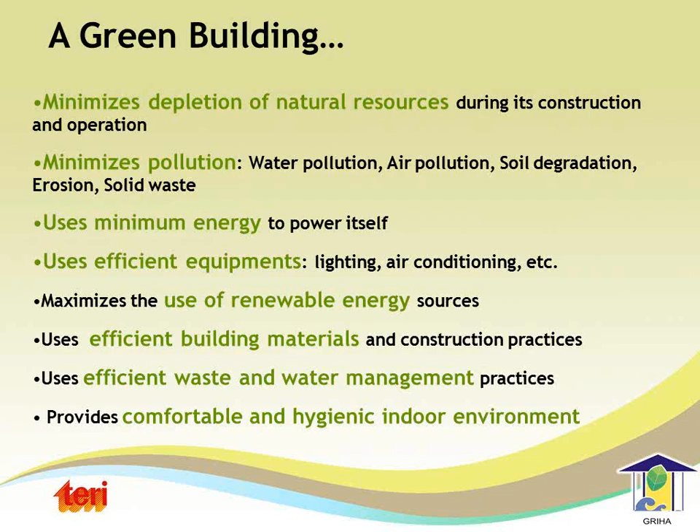A green building, of course, has minimum impact on site and surroundings. And when we construct a green building, we ensure that there is enough erosion control, stormwater management, pollution control, tree protection, and heat island control. Each of these measures has an impact on environment.

For example, as soon as we excavate a site for constructing a building, the water that is an outflow, during rainy season or otherwise, takes away the soil and it clogs the stormwater drainage system that surrounds that particular piece of land where we are constructing. In a green building practice, what we tend to do is to ensure that my surroundings are not affected, which means that I would build sedimentation control systems and other systems to ensure that whatever spillage is happening from my site is taken care of and it doesn't cause environmental degradation around my site.

In a green building practice, whenever a site is assigned for a particular construction, we have to ensure that there is maximum protection of trees, which means that the architect, the contractor, all of them have a large role to play to ensure that as many of the mature trees that are there on site are integrated with the design, and during the construction process they are protected.

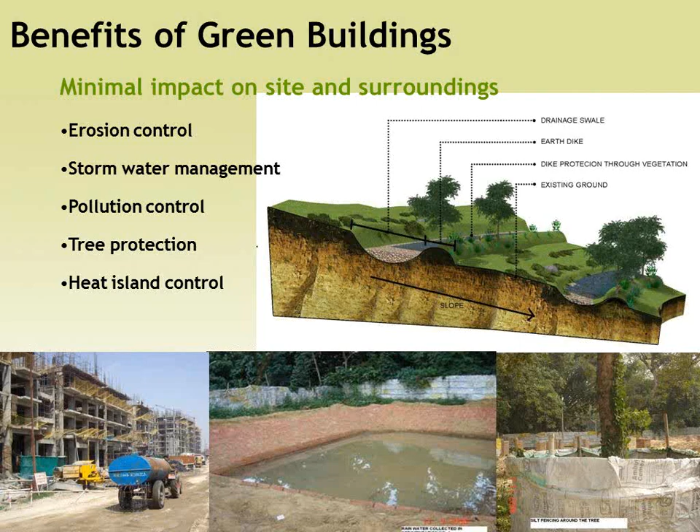The other impact of a building is on the water resources, which is very vital to us. And we also have seen that when we construct greener buildings, we are able to save water through use of better fixtures, better management practices, rainwater harvesting, water treatment on site, recycling and reuse. We are able to save 30 to 40% of this vital resource.

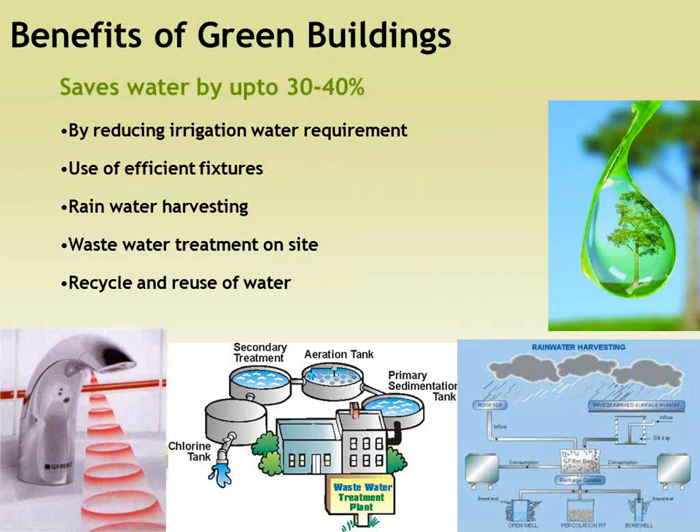And typically speaking, if a design is done well in an energy efficient way, and if we are able to deploy appropriate solar passive measures, which means architectural measures that are conducive to the particular climate zone where we are constructing, and if we are able to use efficient building systems, we can cut down our energy consumption in comparison to a conventional building by up to 50%. And this 50% balance energy can be met through usage of renewable energy systems.

So in the current policy dialogues and in the current dialogue around greener buildings, many of you would have come across the term net zero or net positive buildings, which means these are buildings that not only save energy through energy saving measures, but also whatever energy is required by this efficient building gets generated on site, and the building is not reliant on the grid electricity to power itself.

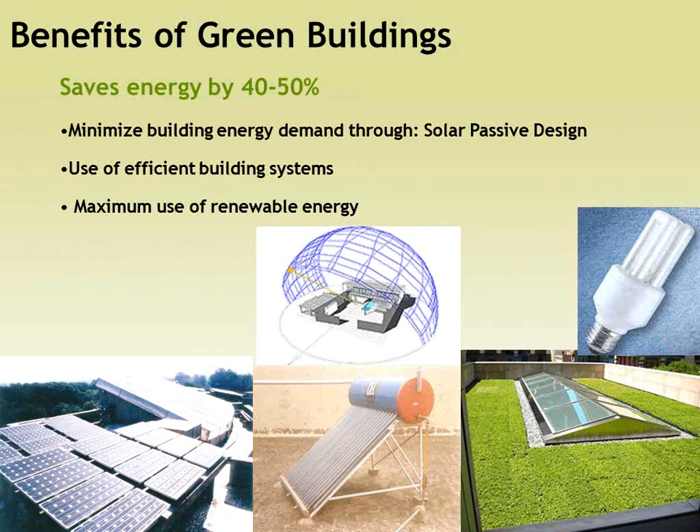So benefits of green building are quite a lot, and another very crucial aspect which is particularly important to India is the issue of solid waste management. In all our cities, particularly if you look at cities like Bangalore and several other upcoming cities, there is a huge problem of solid waste that gets dumped indiscriminately around the city, thereby not only taking up a lot of space but also leading to several other health issues. And untreated solid waste is a huge urban problem.

So if solid waste, particularly the organic solid waste, can be treated on site, then that is another major benefit of a green building. So a green building calls for, when it is under operation, efficient waste segregation, suitable storage and disposal at building level, and resource recovery from waste.

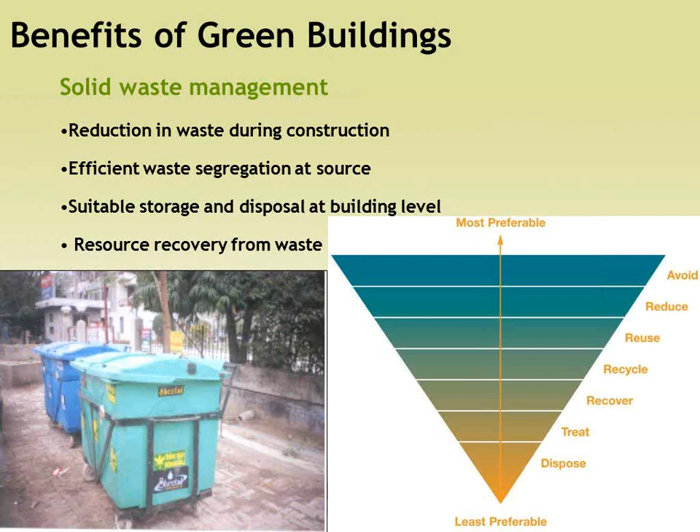And as I mentioned earlier, in a green building, we tend to use more recycled, reusable products. For example, usage of fly ash and blast furnace slag in building construction, say replacement of cement in concrete by fly ash, or use of fly ash blocks and bricks, can not only help us in reusing waste products but also leads to lesser embodied energy content in a building.

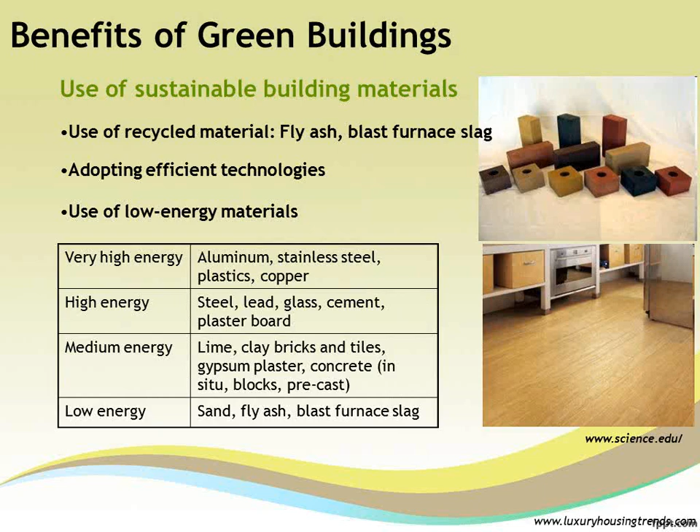So if you really see in a building, there are certain items, for example, aluminium, steel, plastics, copper, which have very high embodied energy content, and we should try to use these materials minimally and tend to use more low energy materials. And as I mentioned earlier, green buildings of course provide a healthier and more productive environment.

Now coming into a bit more detail on how and what you and I can do as a common person, let me dwell a little bit more on the energy efficiency aspect of a building. Because energy is becoming more and more expensive by the day, unless we are able to tap the energy efficiency aspects right from the design stage, we cannot get the maximum benefit through green building design interventions.

So when we look at energy efficiency incorporation, basically at the design stage we look at the site and surroundings, incorporation of energy efficient architectural features, use of better building materials that help you to reduce the heat gain, and daylight integration, which means that if you are able to use daylight for the maximum time of the day, you can save on electricity consumption in lighting.

Then on the system side, you look at use of better products, both in lighting as well as in cooling systems, for example, ceiling fans, air conditioners, low energy cooling systems. And then you also look at finally renewable energy integration through solar and other devices.

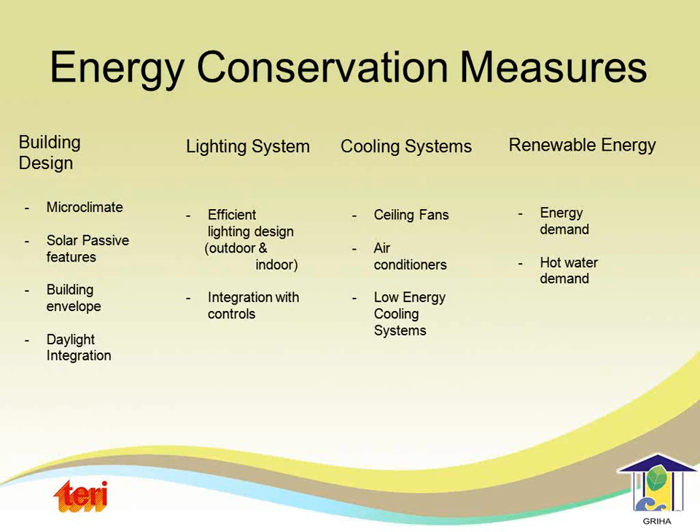Broadly classifying energy efficiency interventions, let me share a few of the design interventions that you and I can use. First thing is to look at sustainable site planning, then incorporation of passive features, optimization of building envelope, and daylight integration and natural ventilation.

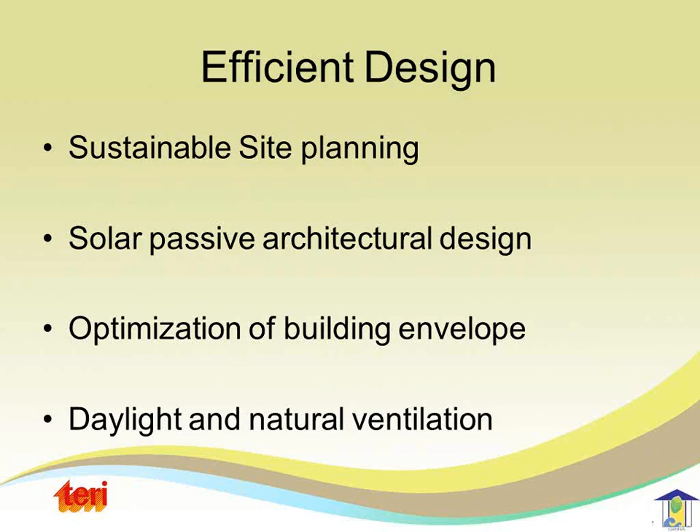Coming to sustainable site practice, as I mentioned earlier, it is very important to protect the trees, not only because of the fact that trees act as a great sequestration device, but also trees provide much required shade of the building, which has a natural cooling effect, as well as it has a large impact on creating cooler microclimate, which is very important for a hot climate like India.

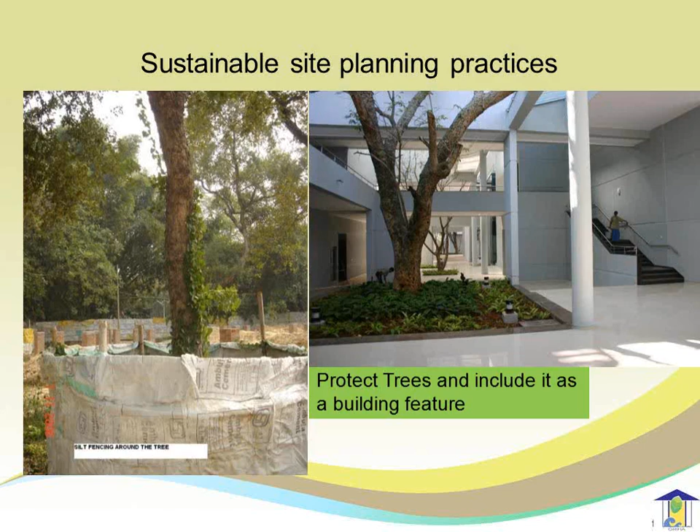The other thing which is very important, as I mentioned, is use of sedimentation systems to ensure that your site pollutants do not pollute the site and surroundings around your particular project. The next thing which is very crucial is usage, protection and reusage of topsoil. As we all know, the first few inches of soil which is able to support vegetation is very fertile.

So during a normal construction process, we tend to excavate everything and throw it out. However, it is very important to store it separately and reuse it back for landscaping purposes, which saves on valuable water requirement when you are putting in the landscape, as well as usage of chemical fertilizers.

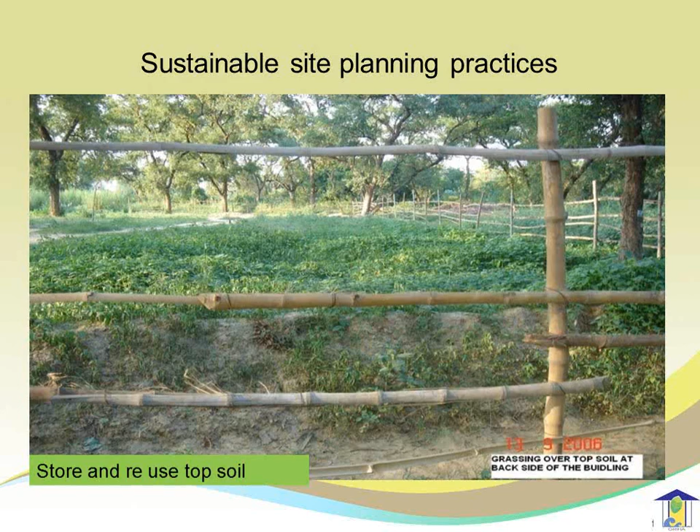The next important thing which we must take into account is limiting the construction footprint, not indiscriminately spoiling the entire site and strewing construction all over. And also importantly, take adequate steps to mitigate urban heat island impact, which means lesser usage of paving around your site, usage of shaded pavements, or usage of high albedo reflective surfaces.

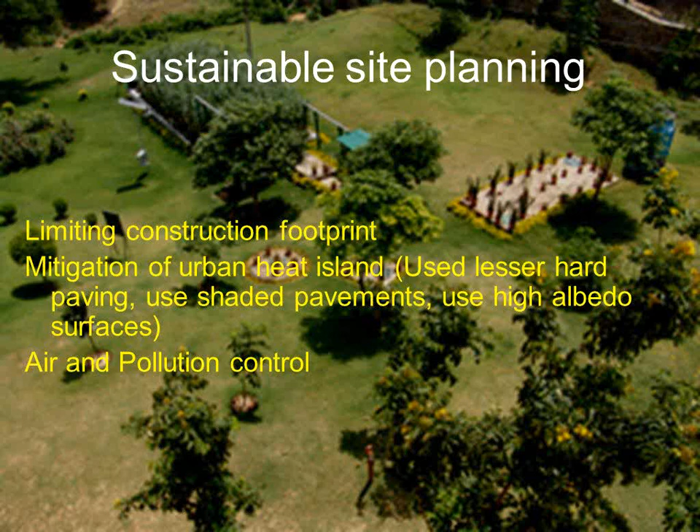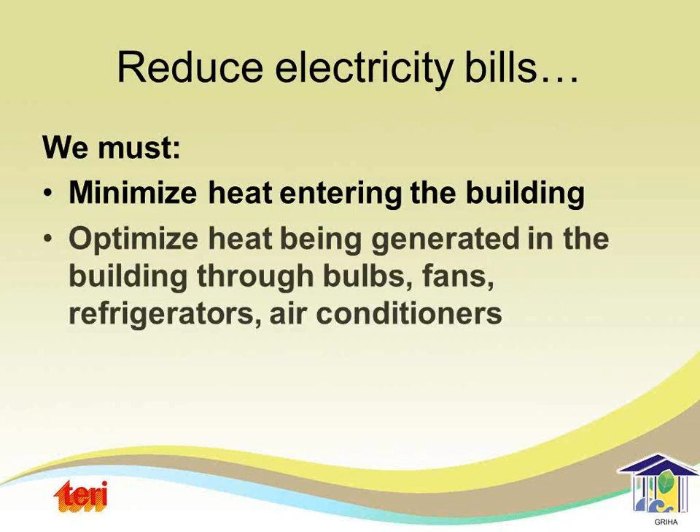Coming to what you and I can do to reduce our electricity bills, particularly these few slides are applicable mostly to hot climate like ours, where through an appropriate building design, we must try and minimize heat that enters the building, optimize heat that is being generated through the different devices that operate in a building, which means the internal loads, use efficient appliances, as well as use adequate daylight and avoid artificial lighting.

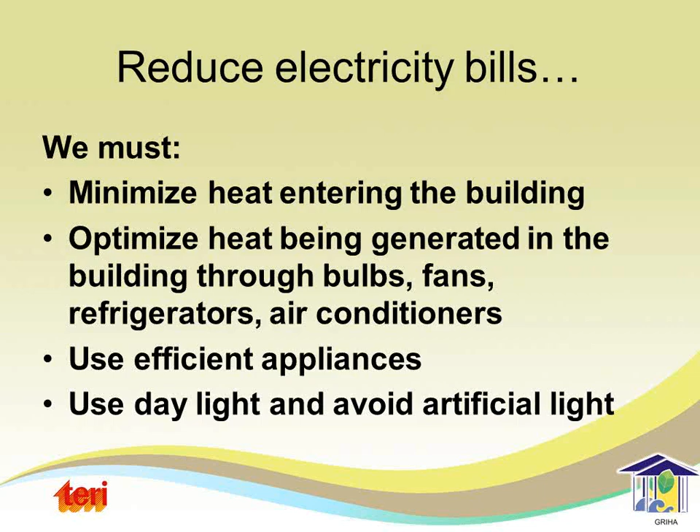Now, obviously, you will ask what are the impacts, like why is it essential for us to consider all these things, which will help us to reduce our electricity bills. Often we don't realize that when we switch on appliances such as computers and artificial light, in addition to consuming electricity, they also generate heat. A computer or a light as a source, in addition to performing its function, will generate heat that adds to the heat load of a particular space.

For example, 12 computers will need about 1 ton of air conditioning to remove the heat they generate. In a small room, if you have 12 computers operating at the same point in time, in addition to whatever air conditioning you are putting, you will need 1 ton of extra air conditioning to remove only the heat that these computers generate.

Similarly, suppose in a room you have 35 normal tube lights, and you keep them on unnecessarily even during daytime when you can use daylight. For the heat these 35 tube lights generate, you will need an additional half ton of AC to remove the heat. So these are often some of the things that we tend to ignore, and we must keep them in mind if we are trying to save energy.

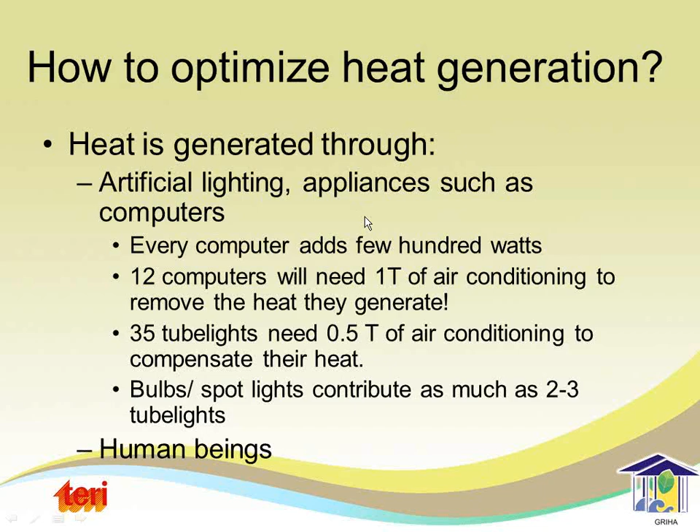Similarly, human beings are also big producers of heat, and the more people you have in a room, the more heat you need to remove. So all of these add to your air conditioning load and your electricity bills. So obviously the next question would be, how do you minimize the heat that comes into a particular building? There are a few common tips which everybody can follow.

One thing is that you need to protect your roof, windows and walls from heat gain, and the simplest thing one can do is to shade them appropriately, use appropriate building materials, and use appropriate insulation products in places from where the heat will come in.

So 3 things you have to keep in mind here: how you use effective roof insulation, what kind of shading systems you provide in windows and what kind of glass you use in windows, and what kind of insulation and material you use for walls, because these are the 3 key components through which the heat will come inside a particular building.

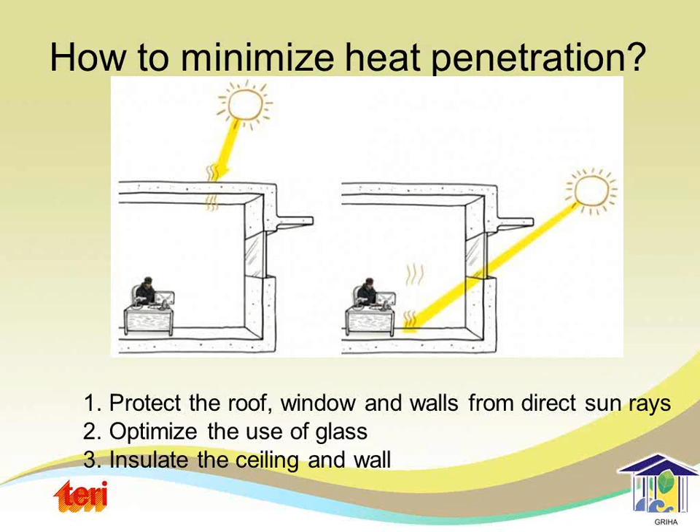The other important thing is orientation of a particular building, in which many of us do not have much control. However, if you have a control on deciding which orientation your rooms should face, ideal orientation is north and south, which means that you should have minimum exposure to east and west, because this is from where your maximum intensity of solar radiation will come in. From south also you get a lot of radiation, but you can protect your south facades by very minimal shading protection. So this is an important aspect of green design, to orient your building well.

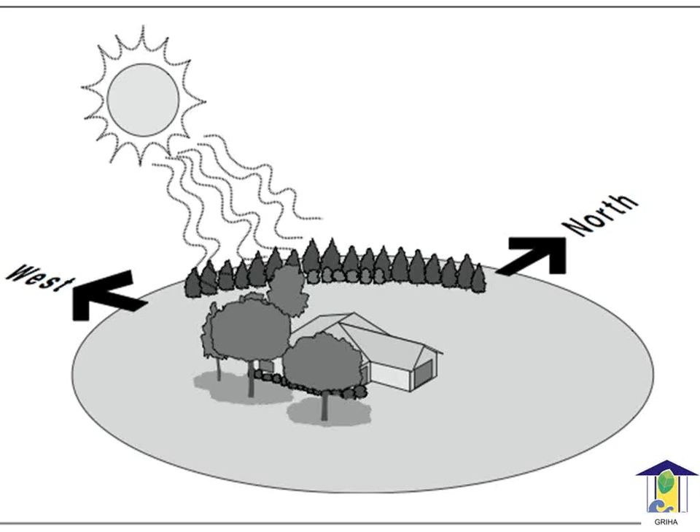Then of course, what kind of materials that you use. In the next slide, you will see that there is a picture of a green roof, which obviously by seeing this only you can make out that it provides a cooling effect. And there are some experiments that we have done, and I'll show you in the slides, how things like a cool roof or a green roof can help to reduce the heat ingress in your building and reduce your energy consumption.

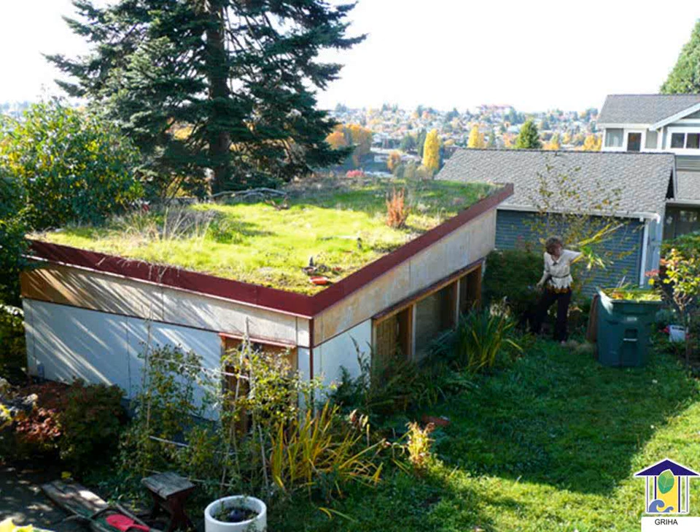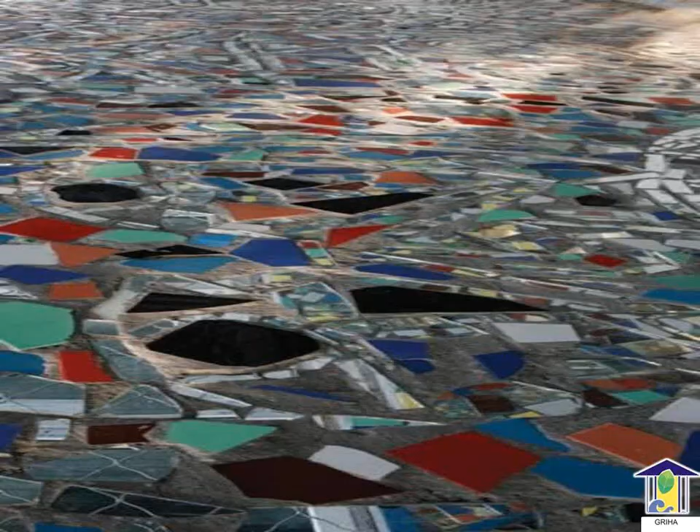There is another commonly used technique, and this is particularly applicable for households that have an exposed roof. As we know, the maximum heat comes in from the roof, and you can use broken tiles, broken china mosaic to cover the roof. The lighter the color, the better. If you are able to do a china mosaic using a white color, then it is the best possible option.

We have recently done certain experiments to see the impact of cool roofs, and we have found that up to 35-degree reduction in surface temperature is possible if you are using high albedo paint or cool roof on your rooftop, and up to 20% of power saving in air-conditioned spaces can be accrued by using cool roof, and this is particularly applicable to the top floor spaces in any house.

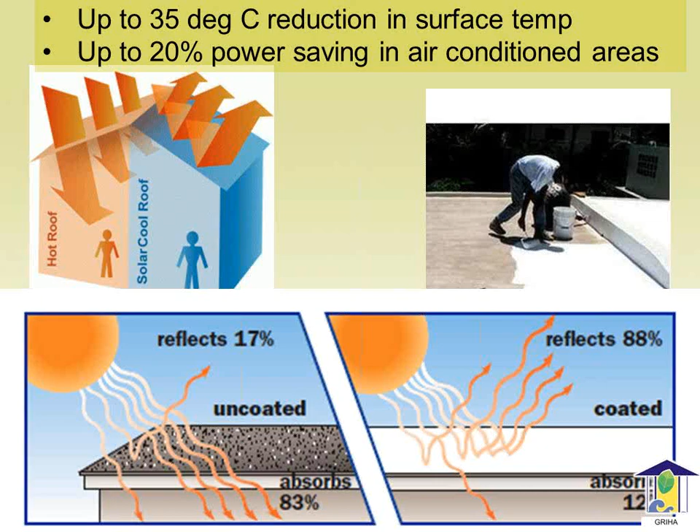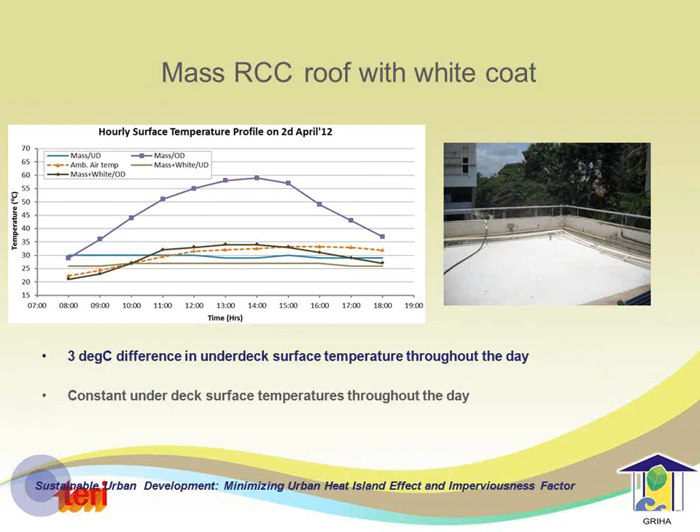Similarly, if some people cannot have a cool roof, you can have a roof garden. The green roof also has a similar kind of an impact and has a great moderating effect on a particular space. So these are some of the common things that one can easily deploy in a house.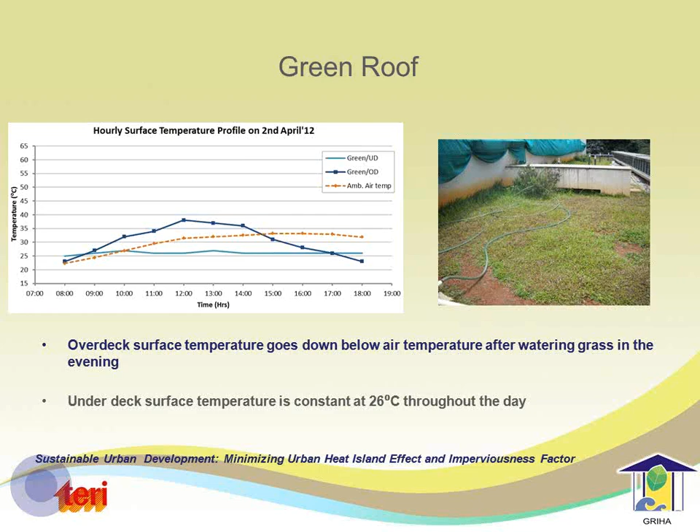The other thing which we tend to ignore is the usage of appropriate kind of glass. And often we do hear, particularly from buildings that are designed to be fully glazed, this argument that if we use a good glass, a high-performance double glass, then I am taken care of. But if you see this diagram, a glass, however good it is, can never compete in terms of its performance with a good walling system, an opaque, good insulated walling system.

Just to give you a comparison, the best high performance glass which you would be getting in the market today, a double glass unit with high performance property, the thermal conductivity value across, from one side to the other, will be in the range of say 1.7 watt per square meter degree Kelvin, whereas a normal 10-inch brick wall would have a thermal conductivity value of about 2, which means that even a non-insulated wall has a better performance, or rather, a marginally lower performance than the best of glass.

And if you are using an insulated wall system, these two can come down to about 1/5 of this value, which means that the more glass we use, we tend to bring in more and more heat into the space and more air conditioning. And if you really see our energy code of India, the maximum limit of glass that has been specified is to the extent of 40% of the wall area.

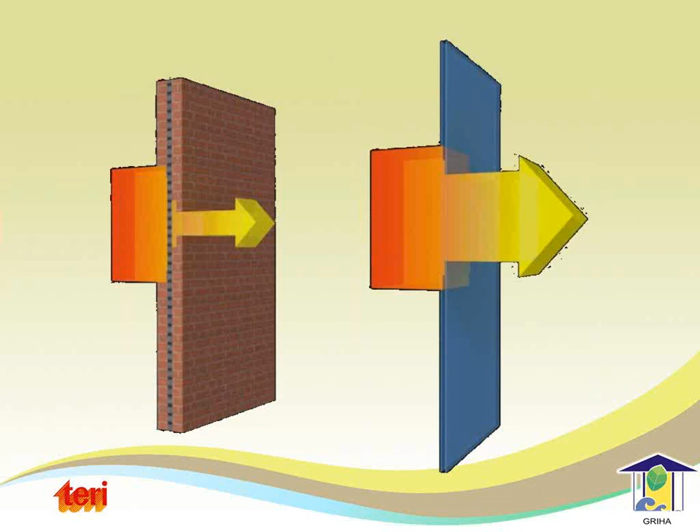So as I mentioned earlier, control of window area is very crucial, and you should be able to optimize, based on your orientation, the amount of glass that you use in a particular facade. And to reiterate once again, the Energy Conservation Building Code of India for a commercial building recommends an upper limit of 40%, though 60% is allowed, of glass area, that is window to wall area ratio. And our experience says that you can manage very well with 20% of glazed area, provided you have the other green design features in terms of optimum depth of spaces, etc., taken care of.

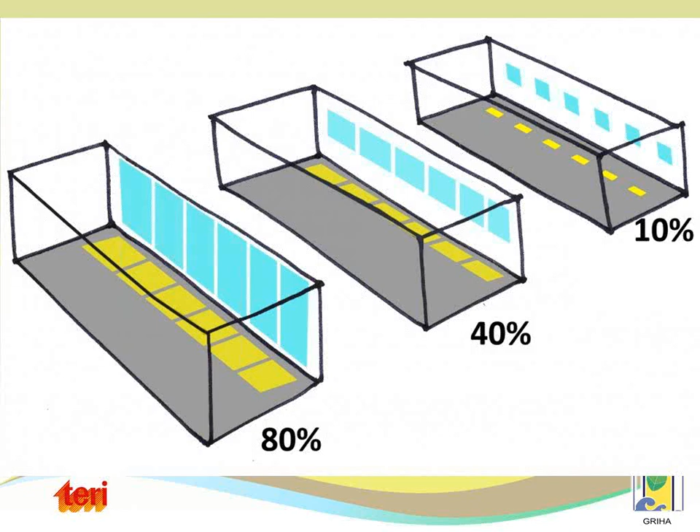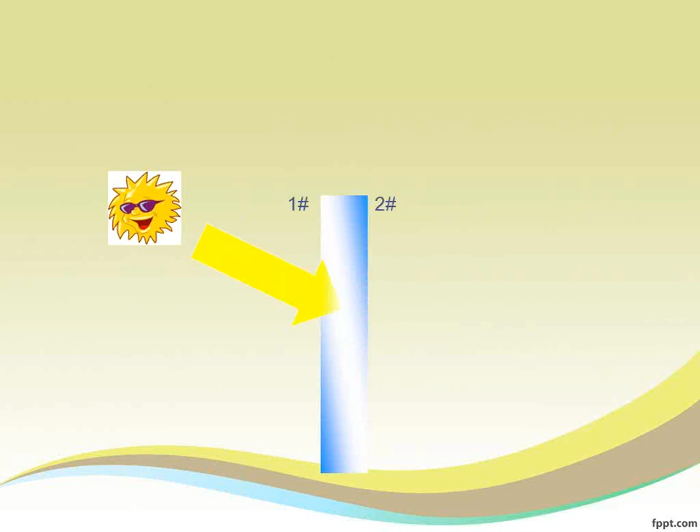The next slide shows you how heat comes in through a glass, and through this I'll be able to explain to you why it is very important to use good glass and to use a lesser amount of glass. What happens is that when heat is incident on a piece of glass, it gets conducted inside that particular space through conduction gains, as well as, since glass is a transparent material, there's a significant amount of direct solar radiation that comes into a particular space, which means that a glass has two ways through which heat comes in. One is because of conduction gains and the other is because of direct radiation.

Hence, there are two very critical properties of glass that one looks into. One is the solar heat gain coefficient of a glass and the other is the conductance or the thermal conductivity. And in our climate, the solar heat gain coefficient is more crucial than the conduction aspect. However, you must also keep in mind that a glass with very good solar heat gain coefficient becomes darker, and hence the daylight that comes in through such glasses reduces. So there has to be a balance between daylight and the solar heat gain coefficient of a glass, and you do get glass which have good properties in the market. However, their costs go up phenomenally as soon as you try to balance these two factors.

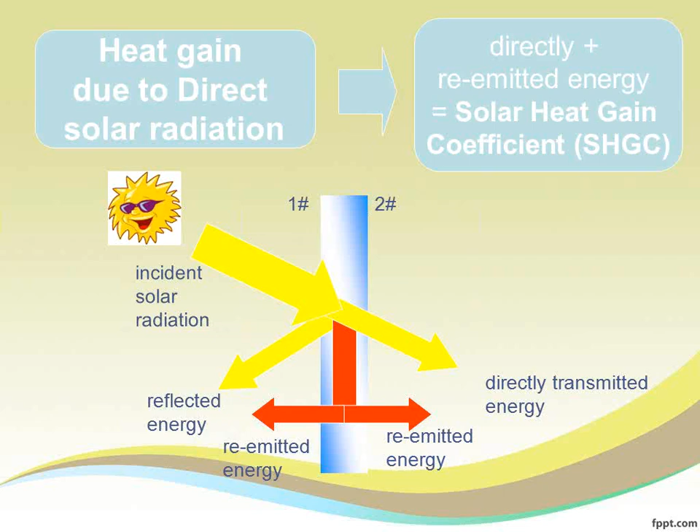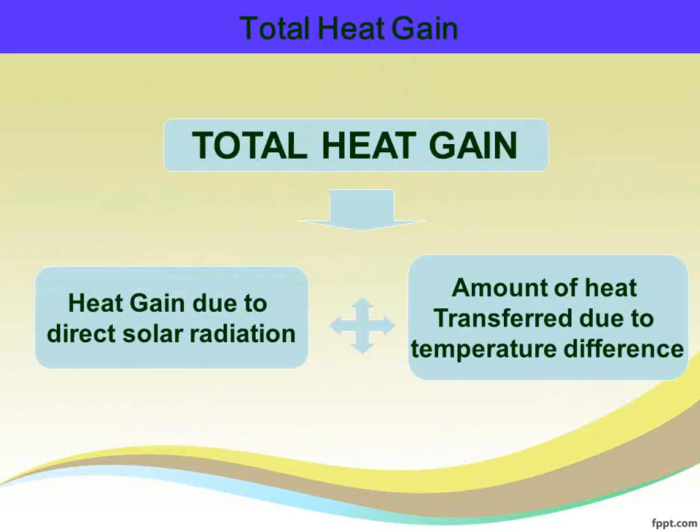So, ladies and gentlemen, it is very important to choose the right amount and right specification of glass if you want to design an efficient building. And I would generally recommend that the best way to protect the glass from the direct radiation coming in is through use of a good shading system. We all do recognize the fact that use of umbrellas, caps, or sunglasses help us to keep cool. And if we try to equate ourselves with buildings, even buildings will be kept cooler if they are shaded and protected. So use of shading devices through trees, through other shading elements, are cheaper options to keep the buildings cool.

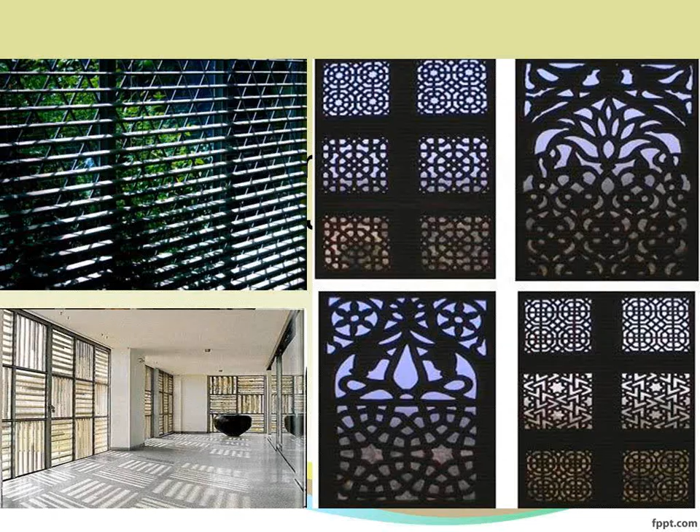And if you cannot do that, then by all means go and choose a better and a more expensive form of glass. However, traditionally you will see that many buildings in India have been designed with traditional shading systems such as jalis, which we see. This not only shades a particular building but also allows natural ventilation, which is again very important for our kind of climate.

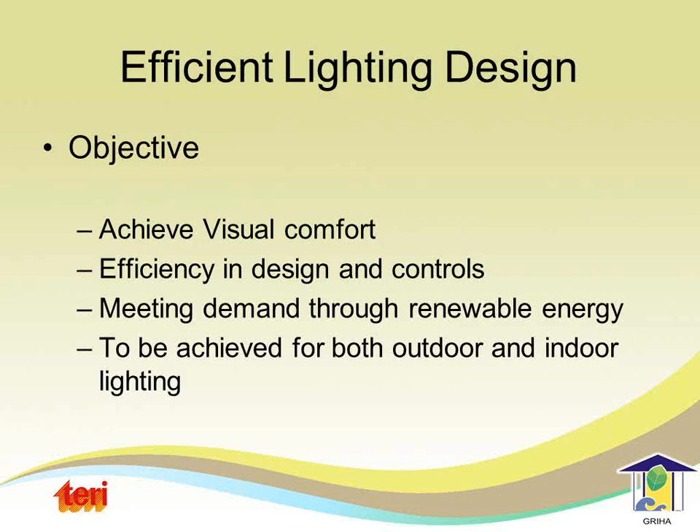Now coming quickly to the other aspects, it's very important to optimize efficiently the lighting design of a particular building if you have to save energy through efficient design controls, and then meet demand through renewable energy sources. And this should be done both for indoor as well as outdoor lighting. Very commonly used efficient lights, as we all know, are compact fluorescent lamps, light emitting diodes, and several other sources. However, I would want to mention one crucial factor here, that we often tend to think that CFLs are the best and most energy efficient sources of light, followed by, or preceded by, LEDs.

There is a common practice of replacing even our tube lights with compact fluorescent lamps, which should not be done. If you really compare the output of a lamp in comparison to the energy that it takes, you will find that T5 or, for that matter, linear fluorescent lamps are one of the most efficient sources that are available in the market.

So indiscriminate replacement of T5 or other tube lights by CFL and other sources, which in common man's parlance we understand to be efficient, should be avoided, and it should be judiciously done after reviewing for what purpose we are trying to replace that particular lamp source.

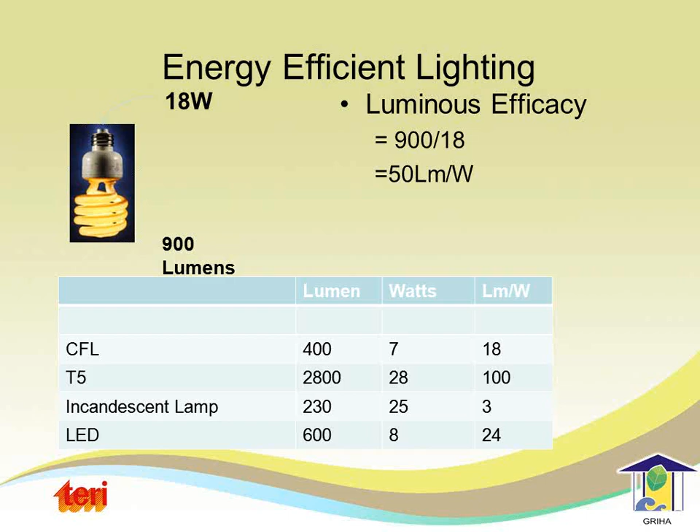There are other means of doing better lighting design and having the best with minimum amount of energy consumption. One is certainly to look at what kind of height you are positioning your fixtures, looking at the maintenance factor, looking at controls so that you are able to switch off lights based on daylight availability, based on occupancy. All of these help us to save vital energy.

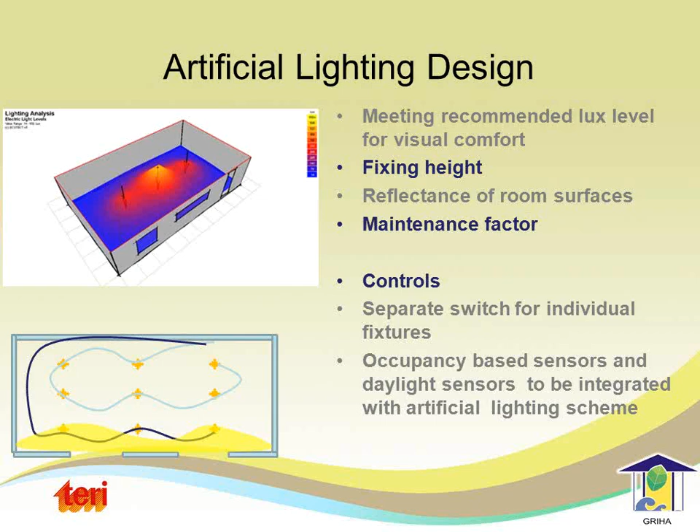Outdoor lighting certainly should be chosen based on different kinds of luminous efficacy, and there are in the market different kinds of lamp sources available that allow us to design outdoor lights with maximum efficacy, and we can use better controls.

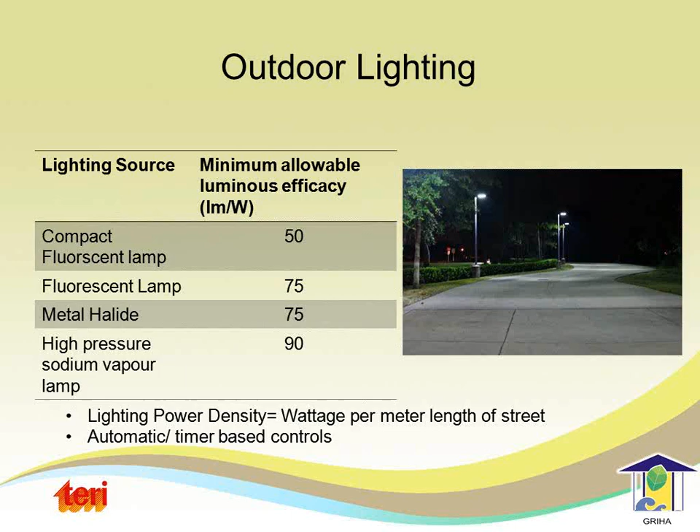Finally, it is important to use efficient space conditioning systems, which means that the air conditioners that we choose, the size that we choose for the space we are designing, should be done efficiently, and a few tips are that we should design only for acceptable thermal comfort levels, not for an overcooled space.

There is a tendency of designing spaces for very, very low temperatures. For example, in a common design process, we find spaces being designed for 22 degrees centigrade, which is very energy inefficient. In our kind of climate, we should try and design spaces to be 25 degrees and above, and that will save us a lot of energy.

And in spaces that are not air conditioned, we can use other means to cool them through different passive means. And even in the air conditioning market, we get a lot of low energy consuming space conditioning systems, and these should be used as much as possible. Just a few of them.

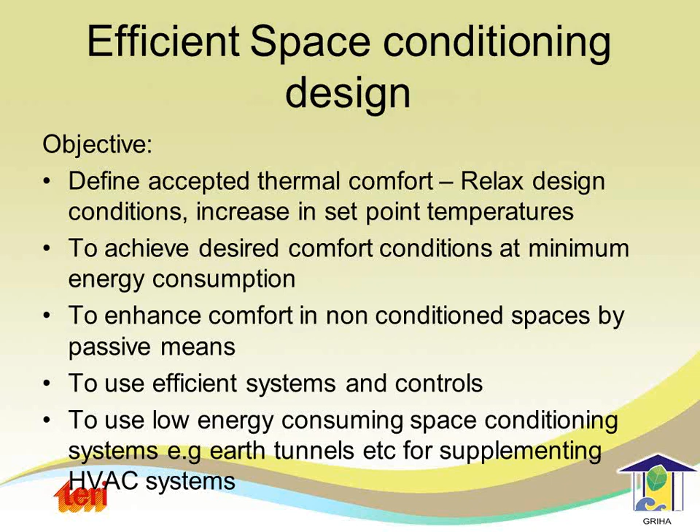We are all aware of BEE star rated appliances, and we find star rated appliances between 1 to 5 star rating available in the market. And the better the number of stars, of course, the better is the performance. And what we find is that you can easily go with up to a 3-star rating. Between a 3 to 5 star rating air conditioning system, there is a marginal price difference.

However, if you are able to afford a 3-star rated air conditioner, then you will be able to reap back the marginal cost difference between 1-star and 3-star within a few months' time only. However, I would advise that you go for a 5-star rated AC if you want to reap maximum benefit, and it will have a little longer payback. However, you will get the payback within, say, a maximum of 2 to 2.5 years of time.

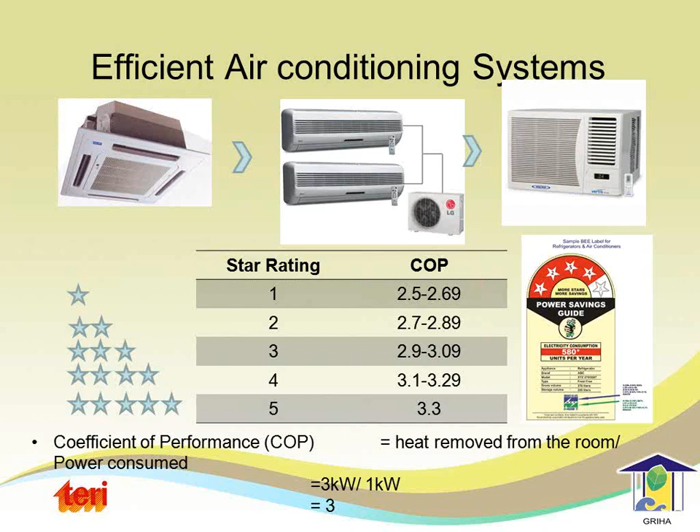And there are other efficient ACs available in the market as well in the large category if you are going with centralized systems. And I'm not getting into the detail because of lack of time.

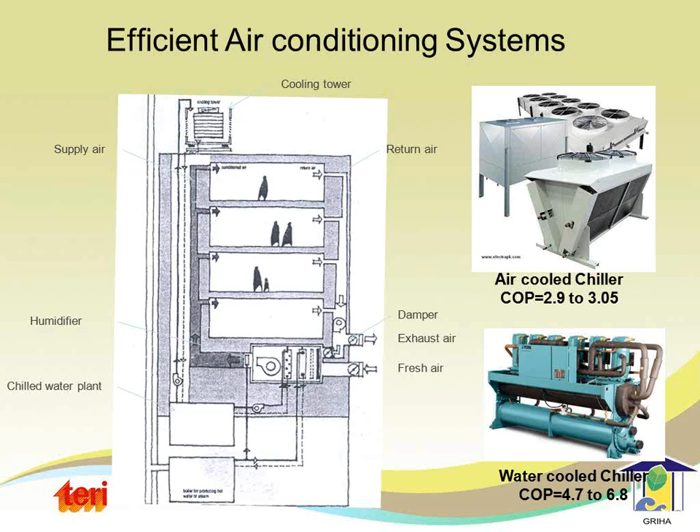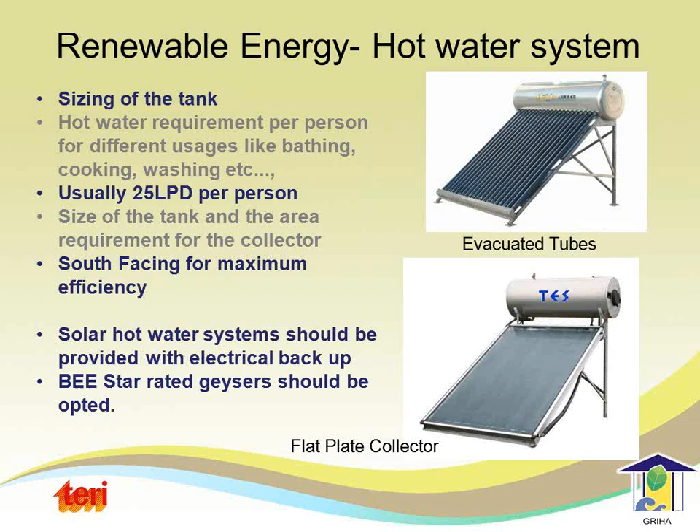And renewable energy systems, the slide is coming up, is the final thing which you should look at. Solar water heating systems and photovoltaics certainly help you to offset your conventional energy. Hot water systems are a mandate in several parts of the country, and they certainly provide a lot of benefit in terms of reducing our consumption level and giving us reasonably good return on investment.

I will come to a case study on a financial feasibility assessment of different residential green buildings that we have done. We took 4 cases and we studied what are the different kinds of energy saving options that can be put in a multi-storied, multi-family residential building. And if you see the 4 cases, you will find that they vary in some parameter or the other.

Now if you see the first building, which is building 1, it has an aerated concrete block, which is an insulating building block, instead of a normal wall. It has roof insulation with 125 mm expanded polystyrene. It has reflective glass. It has a high albedo paint on the roof. It has a solar water heating system, and the developer here provided 5-star window units for all apartments.

In the other buildings I'm not reading, but these ECMs, or energy conservation measures, marginally vary. And we calculated how much energy they will be able to save in comparison to a conventional building. So on average, you will see that with varying levels of energy conservation measures, the energy saving ranges from 22 up to 42%, which can easily be accrued.

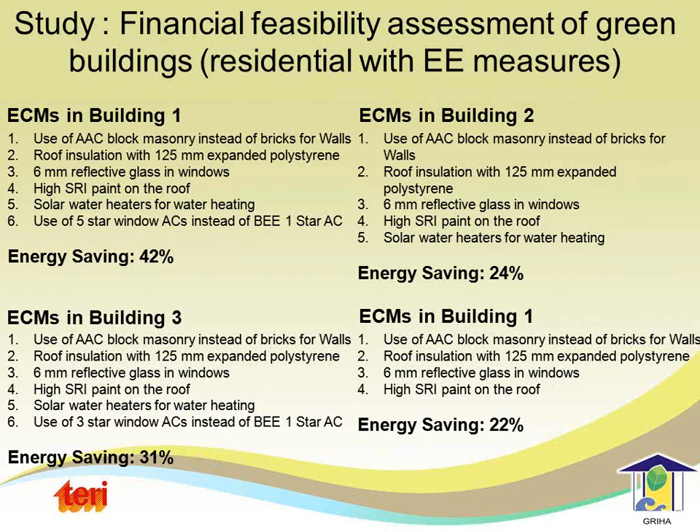Now obviously the question would be: what is the incremental cost? So we did analysis of all these 4 buildings, and what we found is that in the building which had 22% energy savings in comparison to the conventional, the incremental cost was only to the extent of 0.75%. Maximum 42% was accrued, and here the incremental cost was to the extent of 4.5%, and here the maximum incremental cost was because the developer was providing 5-star ACs, which are, as I said, expensive in comparison to 3-star ACs.

However, the energy saving was to the extent of 42%. So if you see the payback period, even where the incremental cost was to the extent of 4.5%, as in case 1, the payback period was a maximum of 2 years. So it really does make a good investment, provided you do it in the right way. And there are a lot of myths around green building which we need to address effectively.

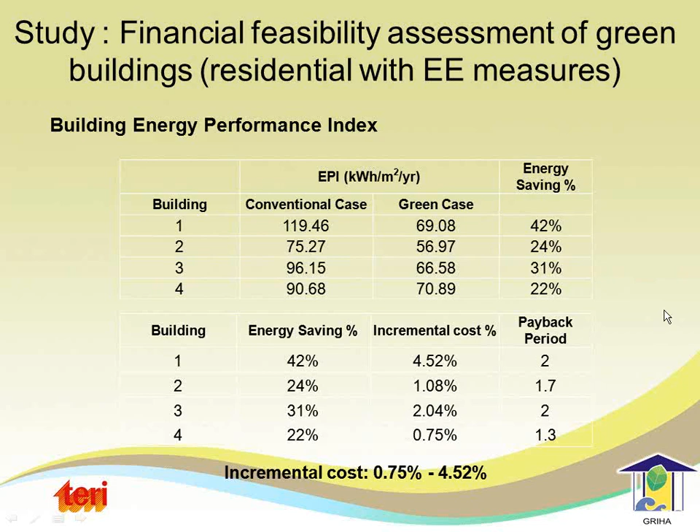Now I will conclude with some slides on water. And here we did a payback period calculation for this particular set of projects, and you will find that it's a win-win. If it is maximum a 2-year payback period, then it's hardly anything in comparison to the life of the building.

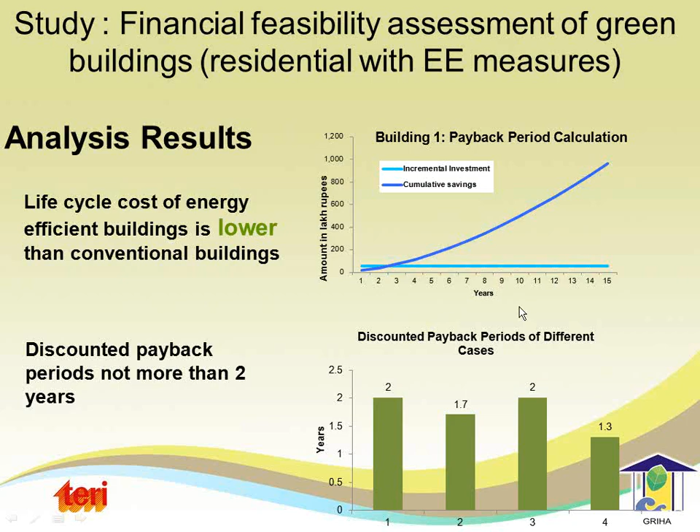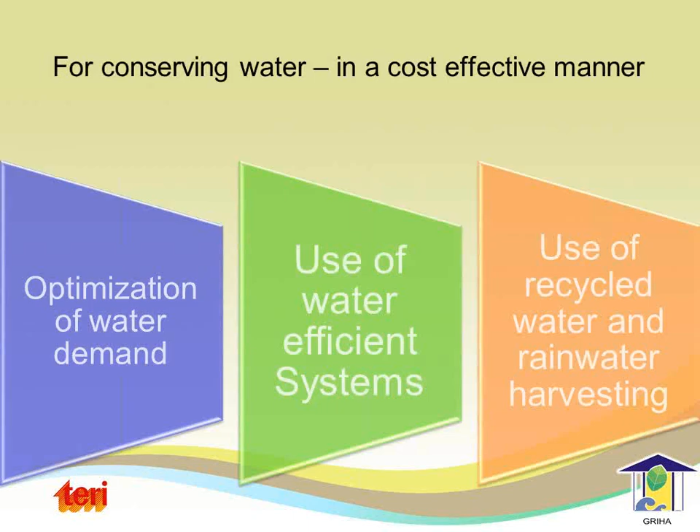The other very important thing is the issue of water. For conserving water in a cost-effective manner, we again need to follow the same approach as we did for energy. That is, firstly, reduce the demand, then use efficient appliances, and finally use recycled water and rainwater harvesting. And there are different ways and means of doing that.

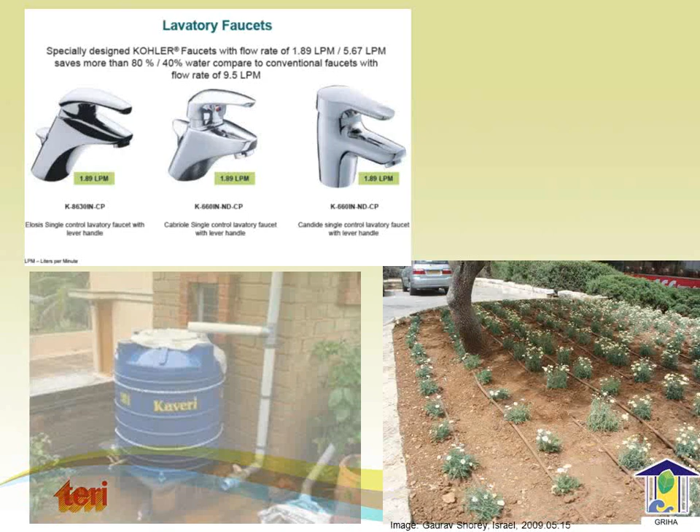We could do one more session on water saving measures, but broadly speaking, we can use efficient faucets in kitchens and lavatories. We can use dual plumbing systems. We can use dual flushing systems, which help us save water. For landscape, we can go with drip irrigation, as well as native species which take up much less water. Rainwater harvesting, particularly storage, can be easily done for rooftop rainwater, which is a clean source of water.

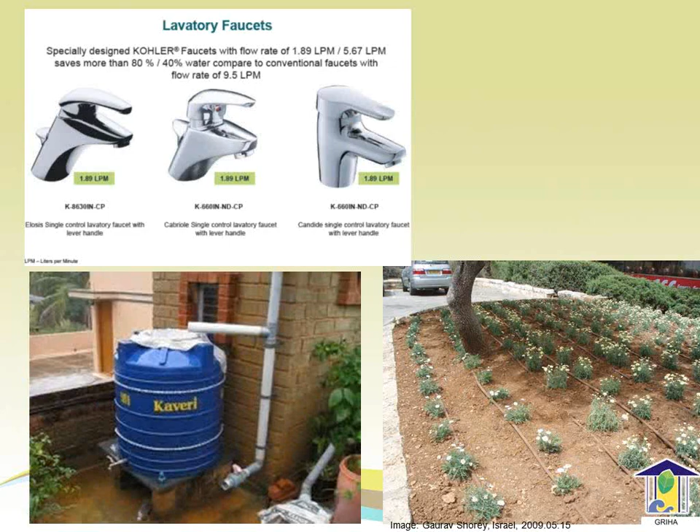We have to particularly exercise caution when we try to recharge water into the ground, and there is a very common practice of recharging directly into the aquifer without proper filtration. My earnest request to all developers is: please do not do that. Mother Earth cannot take polluted water. Recharging rainwater without appropriate filtration will do more harm to the environment than good.

All of this can be facilitated through the GRIHA rating system which TERI has come up with, and which is accepted as the national rating system for green buildings in India, called Green Rating for Integrated Habitat Assessment. You can get a lot of details about the rating on our website, grihaindia.org. It rates the building on a set of 34 criteria and covers many of the aspects that I explained in my earlier slides.